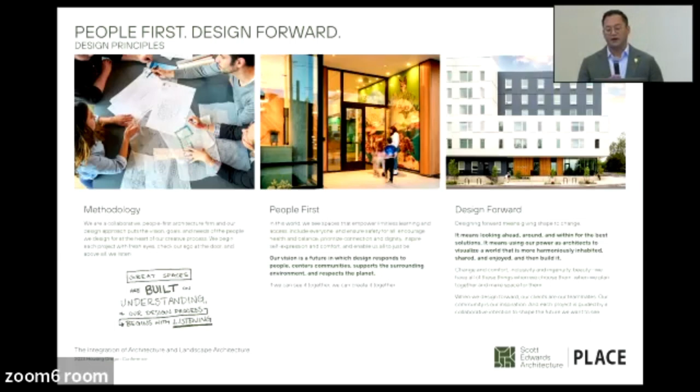The result is a collaborative approach between developers, the design teams, and local jurisdictions that lead to holistic social and physical contextual understanding, and give us the opportunity to create innovative housing solutions.

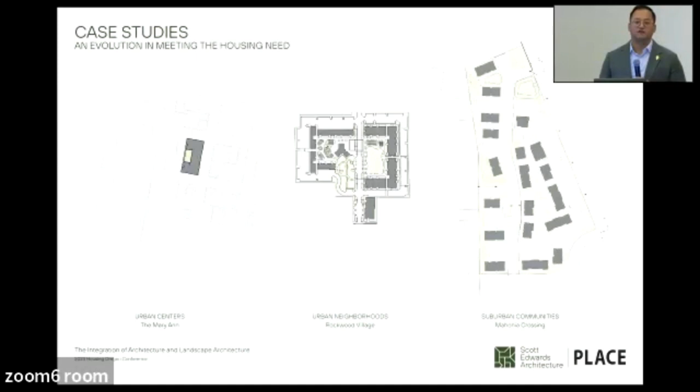So over the course of the decades, we have seen this site opportunity change and evolve. We're hopeful that today, as we go through this presentation, the strategies that we've taken to create homes and to create an integrated approach to placemaking will inspire developers and design teams to question how we explore this new terrain as we see the evolution into suburban environments, where there are site opportunities that are small and site opportunities that are very large scale master planning development opportunities with challenging sites.

So to start us, I think we're going to start with the one that we are all most familiar with, placemaking in urban centers. So the Beaverton project, the Mary Ann, it is a Reach CDC project, and the site is located on Main and First. The site is located between the local high school that you see to the left, and it's on the western edge of the old town downtown core.

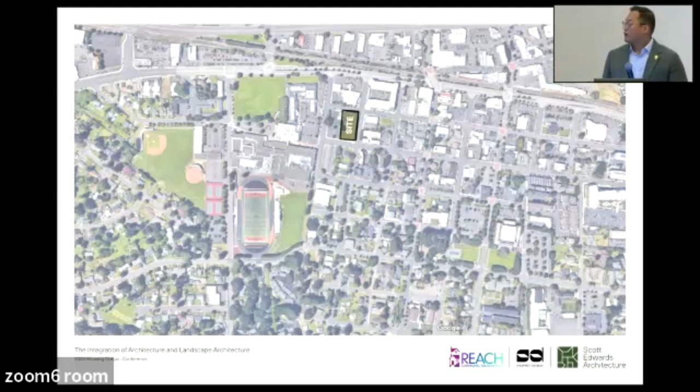This particular site actually has very walkable amenities. It's got a strong context. There was a lot of urban development that had already happened recently in the years leading up to this. So this was the first Metro bonded project. It houses 46 residents.

And the approach to these types of developments on these half block and full block sites, the focus has historically been on zero lot line buildings that have street engagement. The ironic part when it comes to providing housing is that the way the development code for these jurisdictions is often written is that it's really trying to create an activated streetscape, geared towards the idea of mixed use, that there's a mixed use component on the ground floor, the kind of vision for retail and restaurant.

And a lot of times that vision of program doesn't necessarily align with the needs of the residents and the type of environment that we're creating. So on these affordable housing projects, through the years of work that we have done, design teams, not just SEA, but across the board in the state of Oregon and outside, we really asked ourselves, how do you create an activated, warm streetscape when you don't have that mixed use component?

So the first kind of traditional takeaway from this was really creating these activated corners, respecting the desire for these local jurisdictions to have highly visible, activated street corners, but at the same time providing an opportunity where we could create warm, welcoming lobbies that have a direct connection to the outward-facing community. We can program these warm lobbies with direct visual connection to resident services, so they have eyes on the street, and they also engage with the community from a visual standpoint.

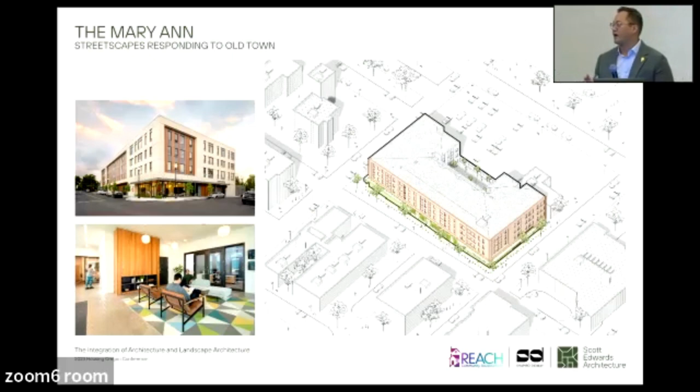On the Mary Ann project, this idea presented an opportunity on the primary corner on First and Main. On the second corner, what was interesting about this project, being the first Metro bonded project, the city of Beaverton was highly engaged with us in regards to programming and what their desires were for the project.

So in collaboration with them, as well as with Reach CDC, we spent a lot of time talking about the fact that you've got a half block building, your lobby is only going to be so big. What else are you going to put in this building? So where we landed, there were two components on the ground floor that were a little bit unique to this project. The first one was on this corner of the building, we decided to create a flex space.

And the idea here was that it wasn't a community room solely for the residents, but that it was a community room that could be shared between the residents, the local jurisdiction, and other communities or other community-based service providers in the area. So over the years since this building has been open, this space has been used for community activities.

That are both with Reach CDC and outward-facing service providers, and it's been used for things like administering vaccinations, getting people registered for health insurance, creating this flexible space that is engaging with the community, and the city of Beaverton is also able to use it as a meeting room for other needs. So it was a way to connect the building physically with opportunities for engagement outside of solely residents inside the building.

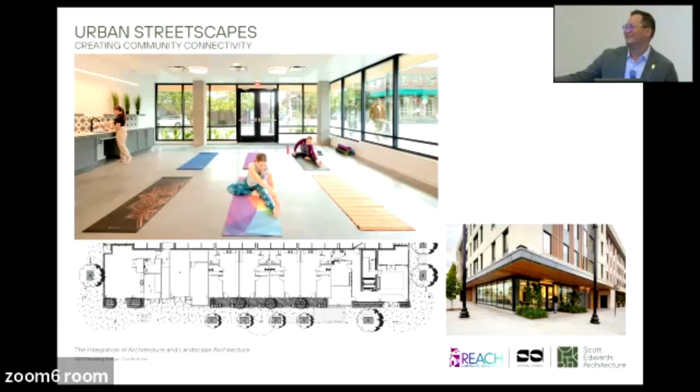Between these two corners, we located a series of ground level units. So this was in response to two things. The first one was the need to fulfill the need for housing on this development, that we needed to provide additional units on the ground floor as well as the upper floors to meet the housing need.

But it also provided an opportunity for us to say, well, street facing ground level units provide a different type of living experience than living above. And how can we create a different but equitable environment there?

So a lot of times when we've done street ground level units in the past, we've done them elevated on a platform in a stoop. The downside is that we recognize we wouldn't be able to create an accessible unit that way. So if somebody says, well, I like the fact that I can have a unit engaging directly with the urban environment, some people just want that garden experience, they don't want to ride an elevator every day but want a different experience. So we asked ourselves, if we do accessible ground floor units with direct access, how do you create this idea of home and ownership?

Through simple strategies of stepping the building facade back a little, we avoided creating a gate, since a gate can feel like a barrier rather than a sense of security. Instead we created a series of elevated planters to give a little breathing room. The idea wasn't to create a patio space for people to live in, but to create a small separation between the public and private realm and a sense of entry for residents.

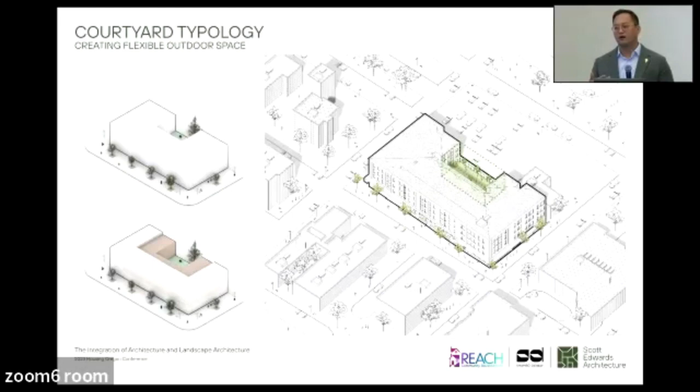When we do zero lot line buildings, our landscape integration story is often isolated to the streetscape. But the good news was that on the half block and full block projects, we had the opportunity to create courtyards, which naturally led to U-shaped buildings and a courtyard expression. On this project, we thought of the darker C shape shown in the diagram as an urban oasis, creating a building facade in a courtyard with a very different expression than the street expression.

This creates an urban oasis for residents that, unlike the ground floor's engagement with the street, offers flexible outdoor play areas. The concept was an open green lawn on the upper floor with seating areas so Reach and service providers could bring out temporary play equipment when kids are out there, but also pack it up to use the space for other activities.

Historically, the idea of creating this outdoor space is to create an indoor-outdoor experience. We provided a community room that functions to hold large engagements, but the idea is that it's a place where multiple generations of people living in the building can come in for art classes, cooking classes, and more.

This was our opportunity in urban environments, where we had the chance for the courtyard typology and these special urban oases. As we go on, the takeaway for us here is that the community engagement strategy on this project really focused on working with Reach CDC, because they know their potential residents and clients, and working with the local jurisdiction, because they had a strong vision for what Old Town Beaverton would be like.

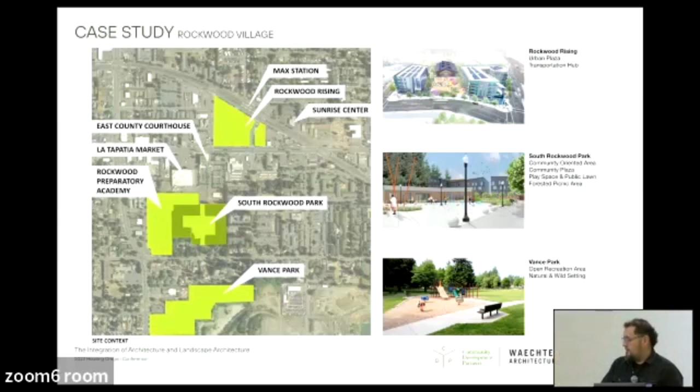The challenges for the site were that there's an open space overlay, and so the need was really to maximize the open space. Working with the city and the county, it was an interesting approach of how the architecture was going to function more as a framework and step a little bit more into the background, letting that open space be the foreground, be the point of interest, not just for the development, but truly for the larger community.

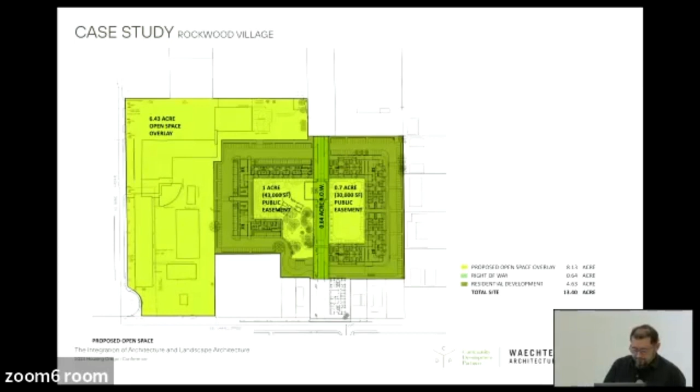The approach is, again, basically working with that super block and trying to break it up into smaller pieces, working with the urban grid.

One of the elements was that we needed to start thinking about connectivity north to south, with the addition of a street bisecting the site with a future connection to the county courthouse. That would be part of a future development, but trying to set up the stage for that connectivity. So that was a good synergy with the county to think of ways we could achieve that.

Again, this idea of the donut, if you will, is that we concentrated parking and vehicular circulation on the outer edges of the site. The architecture also helps create that articulation of the space, and then all the community events and community spaces happen in the interior, taking advantage of that street, which we figured out a way to pull the neighborhood through.

So that was always in our minds - how do we announce to the community that this space is there and available for them, that it doesn't feel like you're entering private property, but truly becomes a community asset.

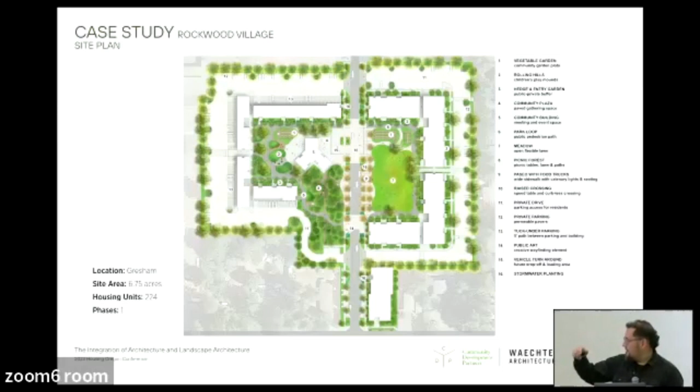So the program of the - sorry, this is not... does this work? There you go.

The basic organizer of the open space revolves around two elements: basically a community building that is kind of like a jewel piece in the middle of the open space, and it provides multi-use open spaces for meetings and gatherings.

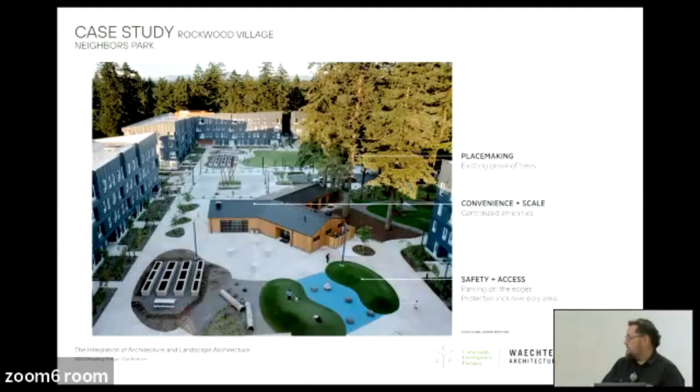These ideas of community building elements, such as the community gardens, play areas for children, and then the preservation of an existing grove of trees - it's always a great opportunity to save those trees. And you have kind of like this history of the site.

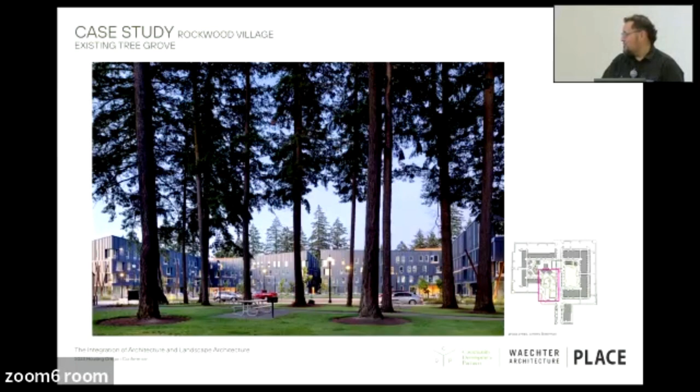You have this day-one character that the vegetation can add to it, creating these more passive and picnic areas. And then again, with the architecture in the background, kind of creating that backdrop, while also very elegantly and sophisticatedly articulated, but really letting the open space be that centerpiece.

Speaking of that street and how we address the idea of guiding the community to use the space, we also worked with the idea of incorporating art. These sculptural elements became like a wayfinding and identity element.

They try to be present at the south corner and then draw people in as a way to read that there's something going on further up.

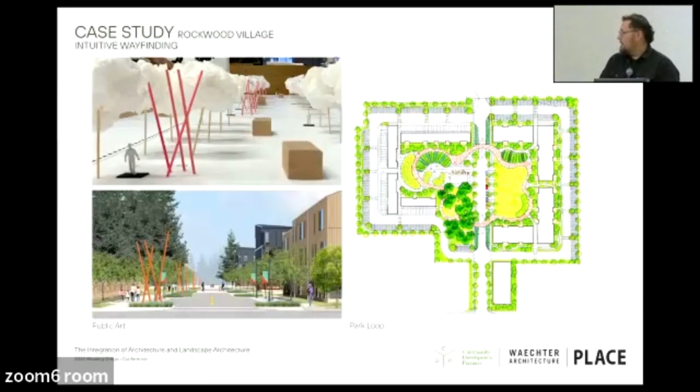And then even continuing beyond, the idea is that we would have this connection to the parking to the north, to the courthouse. We worked with Mudbone Grown, an organization that promotes community agriculture in the city, to provide basically a community farm that would create that use of the space, and it's been very successful - to the point that they're producing so much food.

One of the bike rooms that we originally had in the buildings was transformed into a food pantry. That was something that had not been anticipated, but the need and the offer are so great that now that's its main function.

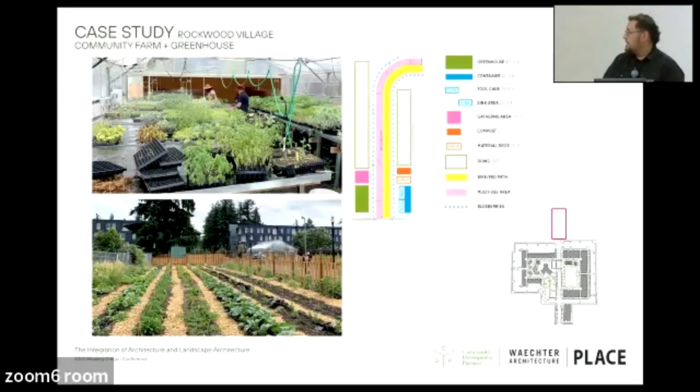So it's been great working with them, and Place helped articulate that site planning and how to make it efficient, and address other programmatic needs that they have in terms of buildings, greenhouses, and things. So really the lesson learned from this revolves around a good community engagement process that we worked through with Waechter, CDP, Hacienda, CPID, and Place, so that it's not just another project.

There was this sentiment that why is all the affordable housing going to the East County, and why is it the only development that we're getting? Through the community engagement, we were able to talk to the community, understand their needs, understand their concerns, and really focus that we're not just sticking you with a development. We're providing a community asset that is going to benefit everybody, and truly feel like it's contributing to that community building, paying a lot of attention to what those needs are, and then responding to those.

So that's the biggest lesson learned, and we're very proud and very excited about the future of this place. Talking to people that grew up in the area, they feel like it's really transforming. It's not the old Rockwood neighborhood that they used to know.

So in our evolution, now we're going to talk a little bit more about taking it to a larger scale and more of a suburban context. So let me get back to Dave.

So I think this next project, Mahonia Crossing, is a two-phase project that is housing. It's a community for all ages, servicing both families and seniors on a single development. It's providing 313 homes, targeted to open next year. When we looked at the themes of this year's conference, this project in particular was the one we thought had the most applicability for lessons learned on how we potentially approach rural communities moving forward.

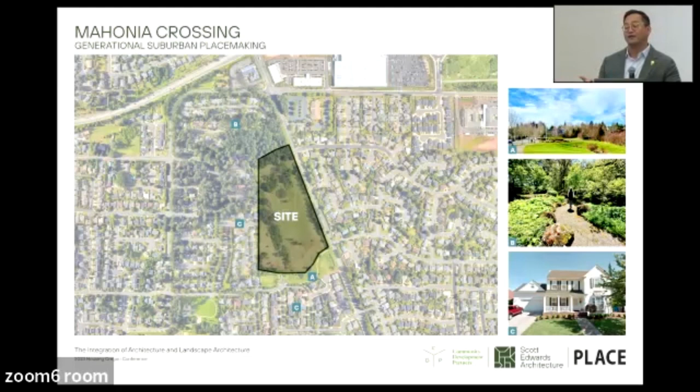The reason I'm honing in on this so much is because the activism we see in these strong, tight-knit suburban communities isn't that different from the activism in tight-knit rural communities where people have grown up and lived their whole lives. Even when the site isn't right next to their house, they're very active in their community and in how they see their cities changing.

On this project, we looked at the traditional approaches to providing housing in these suburban communities—often three-story walk-up typologies with open breezeway corridors and a single entrance. Historically, from an efficiency standpoint, they've been put on a grid, since that's considered most efficient for parking and for providing the number of units.

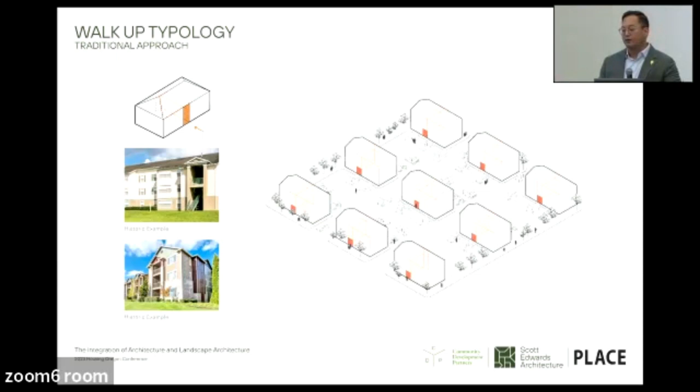But where this model fails is that it doesn't pay much attention to how you create a sense of community. People park, go into their building, go into their unit—there's very minimal opportunity for engagement with their neighbors.

So from an architectural standpoint, we started asking ourselves what approach we could take to the building massing to start breaking it down, so it responds better to the single family homes and provides a transition from the main road through the development into the single family residential neighborhood. We looked at different strategies—how do we work with gable roofs, how do we maybe turn these buildings 90 degrees?

But I think the most important thing we realized was that we asked ourselves, why are we only providing one entrance to these buildings? For the upper floors, we'll always need a stair and a primary access, but we said we're not taking advantage of the sides of these buildings.

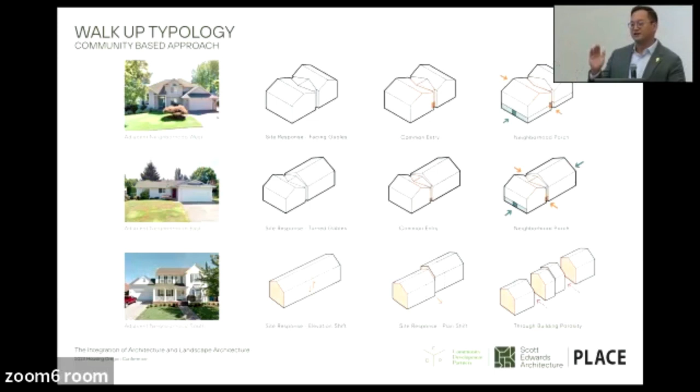So we started asking ourselves, for these ground level units, is there an opportunity to provide ground level access like we did on the Marianne project, but in a different way, creating this kind of side access that's different from the primary entrance. Through that, we rearranged the buildings so those side entrances face each other and act more like a patio, the way single family homes on a cul-de-sac work.

The idea was to give residents the opportunity where I live in a unit, you have a unit across the way, and this little pedestrian access point that pulls you into the development can be a place where kids play, similar to how kids play in a cul-de-sac.

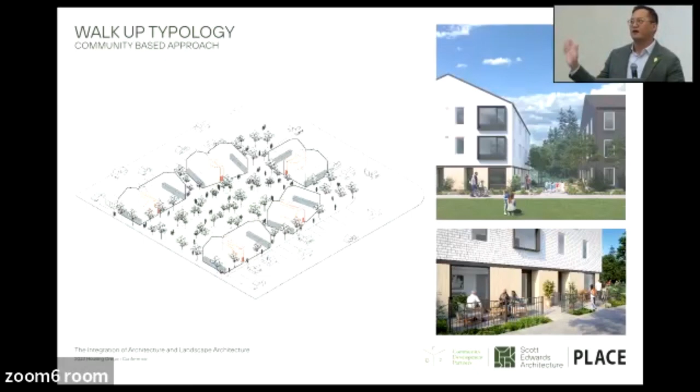In arranging these in more of a side-by-side diagram, we brought back the thinking we saw in the work Place was doing with Wechter on Rockwood 10, this concept of perimeter parking. That opens up an opportunity for a large scale green space, the way that on a very large scale courtyards functioned to bring community together in our urban environments.

So I'm going to let Miguel talk a little more about the site organization and how these diagrammatic concepts came to fruition on a real design.

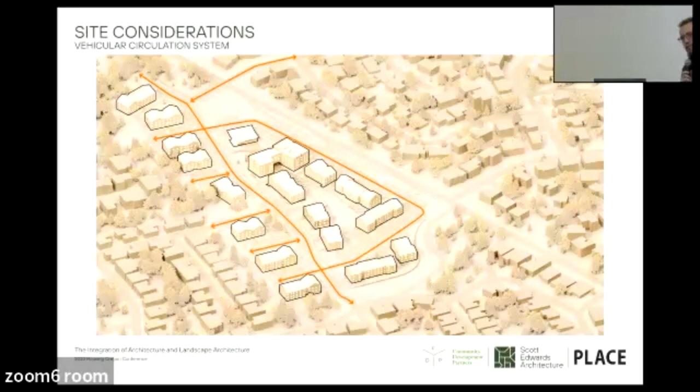On Jurassic Park, when they say 'welcome to Jurassic Park,' this is the part where we talk about the integration of landscape architecture. So thank you for your patience.

This last thing Dave was talking about, the opportunities to address the different sides of the building and create additional entries, really opened up the idea of looking at the circulation and how those buildings interact with the open space.

Organizationally, we first identified the vehicular circulation and parking, the things we still have to meet, but that take up the most space and start defining that arrival experience and interaction with the adjacent neighborhoods. After designing those vehicular systems, similar to what we showed in Rockwood Village, there's a ring of parking on the perimeter that is very intentionally and heavily landscaped.

For many people, that's the first thing you do in the morning when you go to work, you get in your car and drive out. We wanted that experience to start your day well. Then when you come home and park, you're not trying to cram into a compact space, and when you get out of your car, you're able to walk to your house and it's a nice experience. So we're thinking a lot about that user experience.

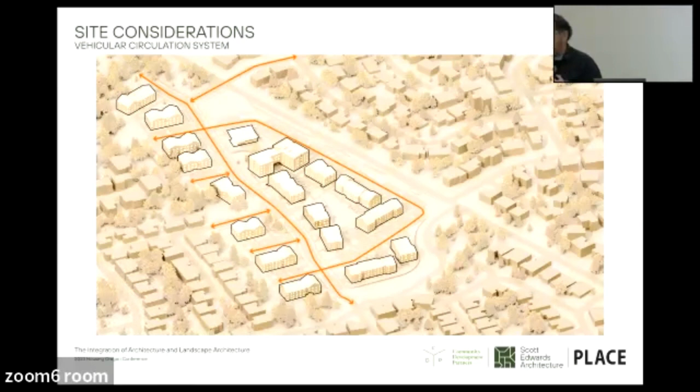With the perimeter definition of that vehicular circulation, we also identified, especially for phase 2 on the left side, how we enter those smaller lots and feed off that main spine, the vehicular road in between.

Then we really start looking at the interaction between the buildings, and those porches or entrances create that sense of neighborhood, so as you're going into your house you see movement, you see people walking by, there's eyes on the street, or in this case on the open space.

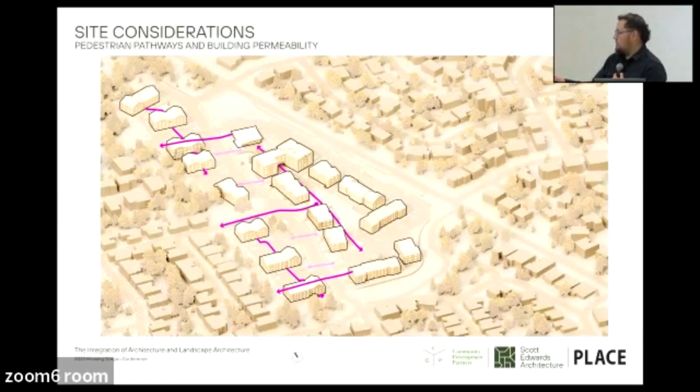It also creates opportunities for interaction, seeing your neighbors, being in proximity, having your areas well defined, but with opportunity for activity and connections, not only to the open spaces and amenities of the site, but also to other areas, especially going over to phase 2 or moving north-south through the site.

In thinking about that, we also distributed the amenities throughout the site, so we create opportunities for moving from one area to another, so you're not always just in your building, but have reasons to interact with your neighbors.

So the community building in purple at the top generates that flow, that traffic to move north-south, but then different services like laundry in different buildings also create that opportunity for movement.

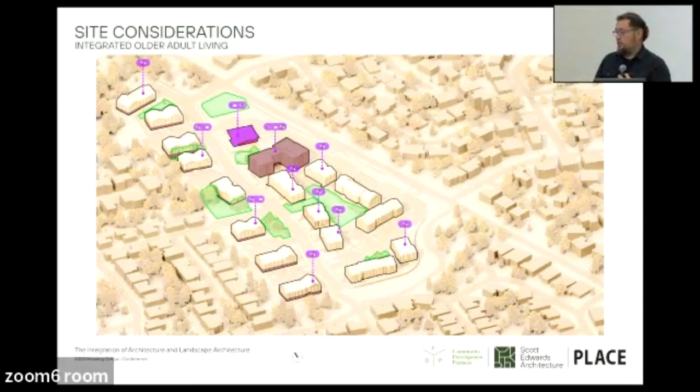From the standpoint of senior living, we also wanted to provide choices. On phase one, there's a building dedicated for senior living, but it's not the only choice. If you don't want to be in the middle of it all, there are opportunities on the ground level on phase two for a more quiet, reserved experience. But we were deliberate that if you go from the south buildings to the community center, you'll go through the senior building, creating opportunities for interaction, for truly multi-generational communities that exchange experiences and activities with each other.

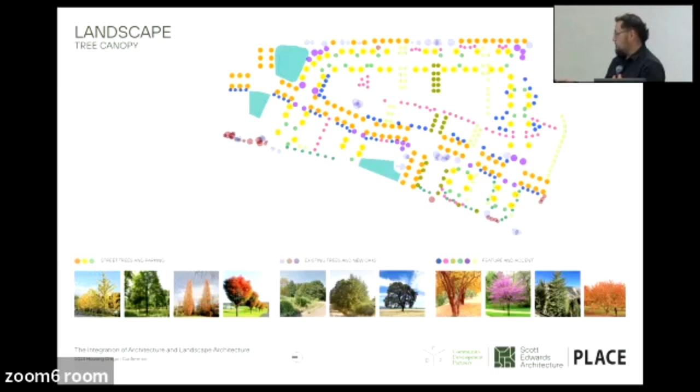The landscape really strives to reinforce all those dynamics. With the tree canopy, we try to provide wayfinding and identity definition, so there's a deliberate character for the streets, the vehicular areas on the perimeter, and different moments as you're entering the site between buildings, creating corridors with their own identity and character, taking advantage of existing trees we're preserving that also provide wayfinding for entries and feature elements, plus accent trees for feature areas.

On the understory side, there's also this idea to create a typology for the walk-up buildings, for the community areas, and for the parking areas, while thinking about maintenance and adaptability.

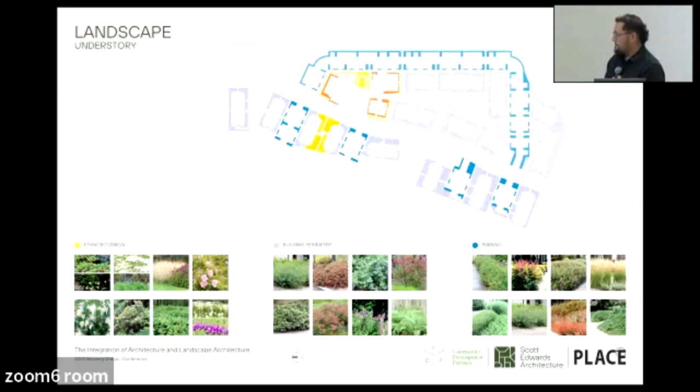We're using a lot of native species, trying to think about something that's going to be easy to manage for the company managing the housing development. And again, that attitude towards the edges and taking advantage of existing vegetation, needs for stormwater management, they also become feature gardens, celebrating these amazing oaks on the site that we were able to preserve, letting those elements inform the landscape as elements of identity, culture, and cultural pride.

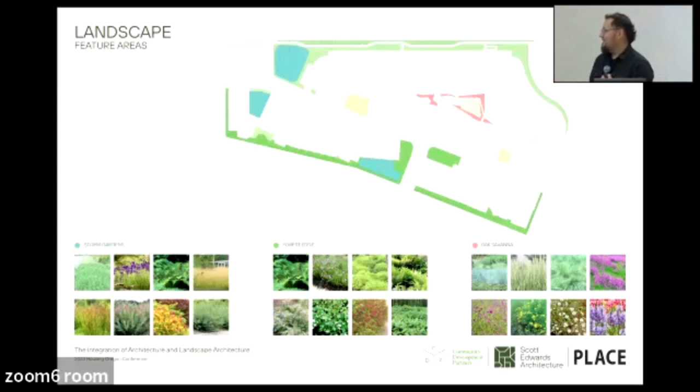The way the architecture and landscape architecture approach come together provides this opportunity for a sustainable community that, as mentioned earlier, is on a very challenged site with a 20-foot grade drop. The approach of working with multiple smaller buildings creates more flexibility on site placement, merging the concept of community placemaking while also responding to the context of the physical environment we have to work in.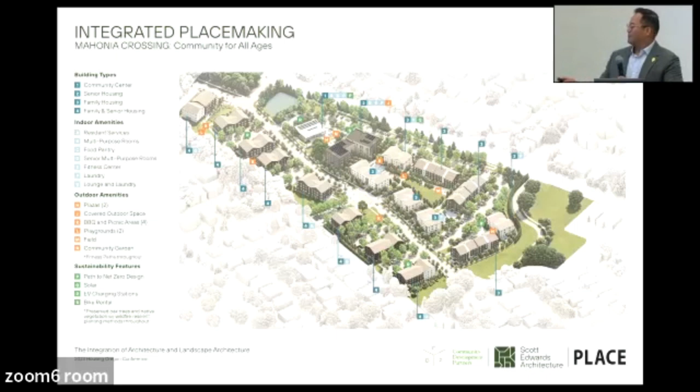This particular one was so important to us because this is the main access, this new road coming through the development, serving as the main access to the adjacent single family neighborhoods. So we wanted to create an experience for residents coming home, not just to this development but to the adjacent one, transitioning from this large scale housing community to the single family residential.

As you pull into the development, the first building is our community center, backdropped by a series of large old oak trees. We went through a lot of effort to save as many existing oak trees as possible, utilizing them to provide screening to the largest building, which is the senior building behind it. This was a concept of welcoming the neighborhood with the smallest of the buildings, backdropping it with the largest building, while using natural elements on the site to screen.

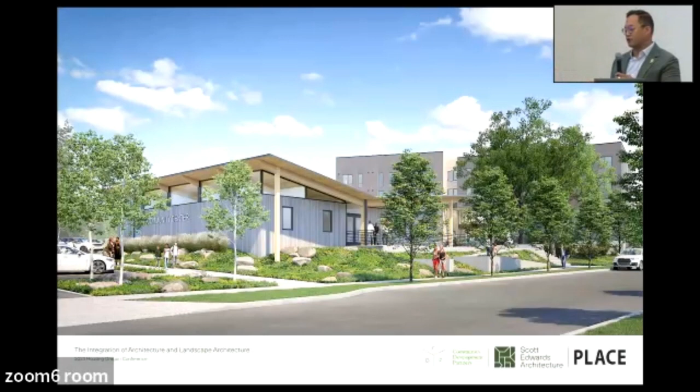As you continue down, that senior building reveals itself on the edge, but we chose to orient it with its shortest side facing the street, then transition to the smallest of our 3-story walk-ups.

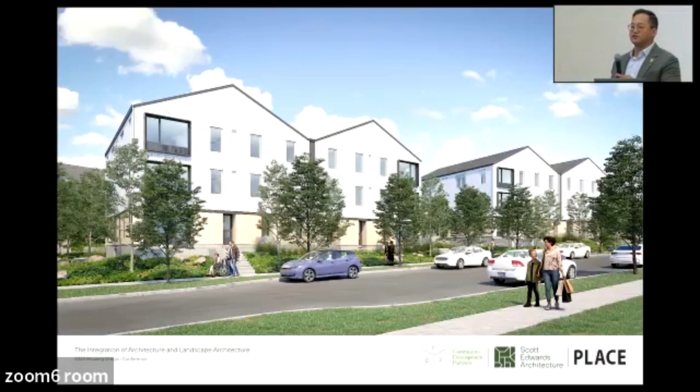So the approach to the 3-story walk-ups from an architectural standpoint was really creating these kind of elevated patios that were responding to the grade change, doing a warm toned base, and then working with these forward facing gables to start breaking down that scale as you transition to single family residential. And then this is a view as you exit and transition into the neighborhoods.

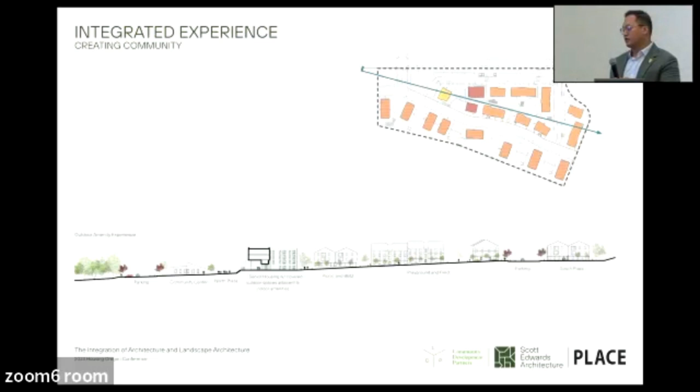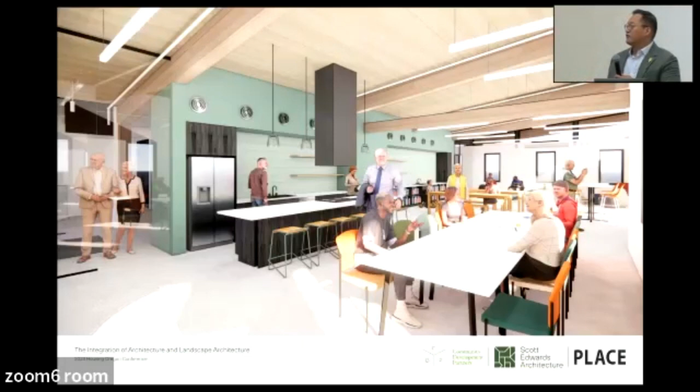So I think we initially started by focusing on what is the experience of this community room. We have, for many of the development teams and designers, a large history of designing community rooms that can hold teaching classes, that are flexible, that are warm. But this community room opens out to a hardscaped plaza area that has, to the left that you don't see in the image here, a community garden.

It's got a learning garden with edible plants, and we worked with PLACE to create this stepped plaza seating area. The idea was that we're creating a plaza bound between the community center and, on the opposite side, the senior building. So we really wanted to take the senior building as a component that can be the heart and the center of this development.

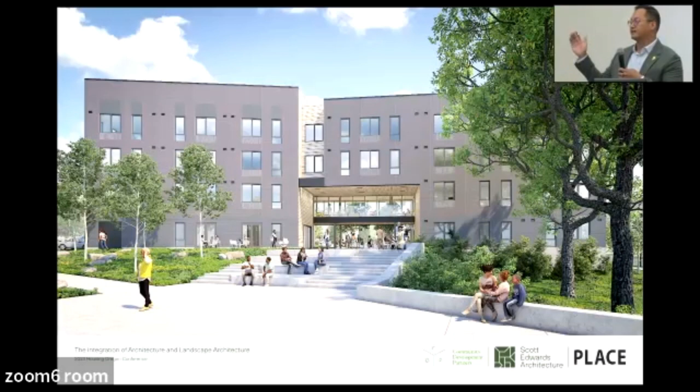Oftentimes, when we've worked with senior housing on large scale developments, they tend to be at the edges of the community, without strong engagement with the family building. So this concept was: let's use the community building and the senior building to create this plaza and make it a feature moment, where the building itself acts as a transition and gateway into a green park. We had the opportunity to create a much larger green park, but we wanted to create a variety of spaces.

The idea with the hardscape plaza was that this can be an area where, if the community wants to have an event, they can put out tables, bring in food carts—a very different experience than the green space you're seeing poking out under this 2-story opening.

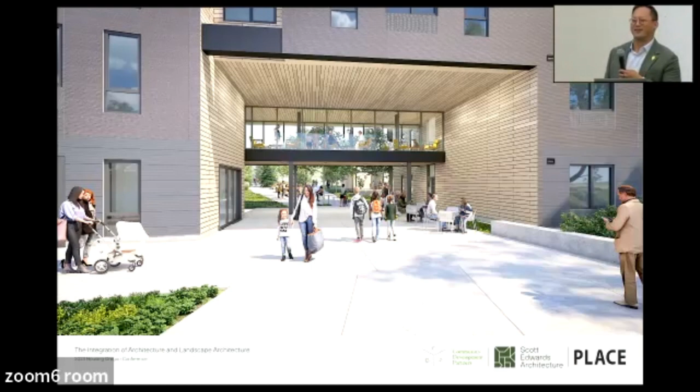There's a glass bridge crossing between on the second floor of the senior building, intentionally placed there because we recognize seniors have various levels of engagement they want to have with the community. In this particular building, a lot of the design team thought about our parents, our grandparents, and activities they like to do. A lot of seniors like to people watch, and we thought that was actually a fun opportunity.

We've got this great plaza to the left, this green space to the right, and we thought this was a great opportunity to take advantage of what was originally just a walkway and create some small lounge seating—an area where seniors, maybe they don't want to be outside in the park, maybe they have mobility issues, but they still want to be able to watch multiple generations, see children playing outside, and visually engage with the community should they choose to.

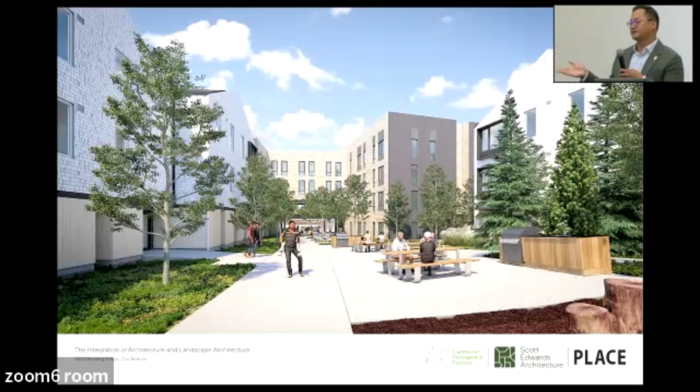On the other side, the senior building takes on a bit of that C shape, similar to the Marianne project we showed in the beginning, but it has the opportunity to work with these other 3-story walk-ups to create barbecue areas and ultimately open up to this bosque garden that place has envisioned for the green spaces beyond.

So the concept here is that we can have a wide variety of experiences on these sites—there's more that we can do with them than just the grid of buildings that we showed in that initial diagram.

So the hope here is that for development teams and design teams, we all do a good job of looking at the precedents of the types of environments we work in. We're hopeful that this presentation shows how our collective work in past sites and environments can influence the way we choose to work in rural environments moving forward.

I have a question about how you approach outdoor furniture selection and choices, and how do you balance outdoor furniture that's flexible and not fixed and can be used by the community, but tends to walk away or get lost, versus fixed. I see in this picture specifically there are fixed benches. How do you approach that balance of choosing outdoor seating and furniture options that will work for the community while also not needing to be maintained or replaced?

Yeah, that's an interesting question we are faced with. In our first drawings we always show loose furniture, and then at some point we have to have a conversation, right? It goes back to management, especially with people from the outside potentially using the space, then it really becomes an issue. So the way we articulate not just the furnishings but the overall flexibility of those open spaces is we try to build a structure so that if you don't have any furniture, you still have seat walls or something that defines the space so it can function without them.

Being very selective is something that sometimes takes a couple of iterations to get right. Like this idea under the bridge for the senior building, at first we thought, oh, this would be a great place to put chess tables and have people playing there, and then we had to adjust because this is going to be an access point here, this is going to be in the way. So it's a process.

But then it becomes about strategic placement, and yes, fixed furniture, but it has to be the right fixture so it provides as much flexibility as we can, like leaving an open space for a wheelchair, or making sure it's not in a spot where it's going to get a lot of sun and isn't going to be in the way. So it's part of the finesse of the design. But also working with management and their desires, whether it's 'no, we want this and we'll take care of it' versus 'I don't want any headaches, so let's just make it as simple as possible.'

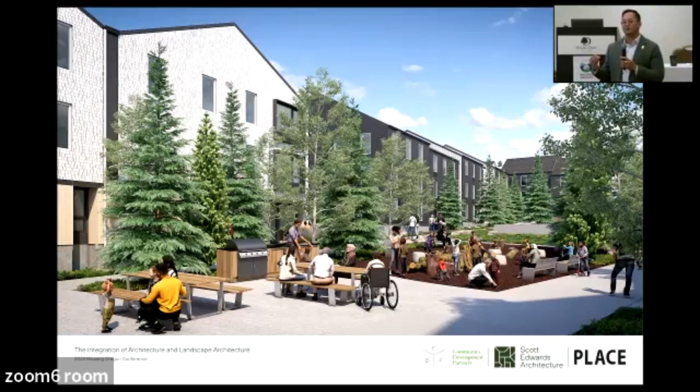On this project and many of our projects, to be honest, what usually happens is we end up with fixed furniture. The remaining furniture ends up fixed, bolted to the ground. Generally speaking, we found that's the best strategy. The hardest part with that is if you're trying to create a table situation, people can't scoot their chair in, so that's always a little bit of a negotiation.

On properties like the Marianne, where it's a community room and you have to go through the community room to get there, when it's really controlled, a controlled environment, small, those are the places where we've been able to have loose furniture, and it's been less of a problem because it's monitored and that room can be locked with no access. On a property like this, they did elect to do all fixed furniture.

So you're talking about those different community spaces, and you mentioned the purple dot thing came up. I'm just curious, was that program something you guys brought into it? Like, this isn't part of your main scope, but these little ideas - what are those spaces used for? I was intrigued because you had the community center, but then you had a bunch around the site.

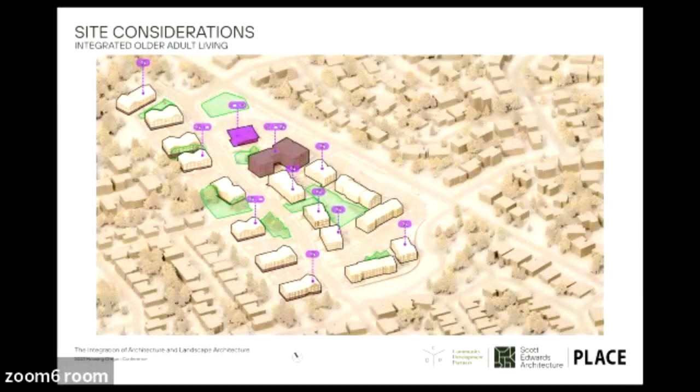Whenever we look at our community spaces, whether distributed on a large site like this or on a 6-story building, part of the reason we like a distributed approach is it provides an opportunity for residents to have passive engagement. So the concept is that if I live on the 5th floor but there's a specific amenity on the 4th floor, I'm going to pass my neighbor. It gives that sense of community just through seeing the person every day when you go do laundry.

On this development, the purple dots, we always start with what's essential for the project. Laundry rooms, when they're shared amenities, are a really great opportunity. On this project, because the site is so big, that was the first thing we started with.

Oftentimes we like to provide residents in the laundry rooms with an opportunity, at least a seating area and a folding table. Most residents, what we've found in our community engagement, is that they don't want to leave their laundry - they have a fear of that. So at minimum we try to provide that seating.

On this development, a couple of those areas we've expanded the seating area so it functions more. We've got a lounge area as well, and then it's got a little TV. It has Wi-Fi access so people can come in there and use it.

Other areas in this building, on the senior building, have their own dedicated community rooms so if the seniors want to get together and have their own place, they can do that. Adjacent to that, because that area is so central, we chose to also add a fitness area, located on the ground floor of the senior building, so it's accessible by the family and younger generations, but also really easily accessible by the seniors.

The idea and hope was that seniors will pass that on a daily basis, and the hope was that they will be more encouraged to use it. So that kind of placement is thinking about the end user.

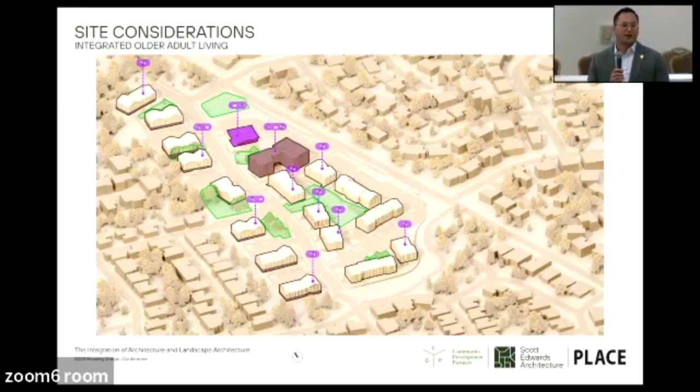Just curious, with Rockwood Village having been open for a year or two now, about lessons learned on the landscape design front - curious if any particular area is not used as much as anticipated, or if there was a lack of something, or you didn't provide enough of something. I'm just curious to hear on that front.

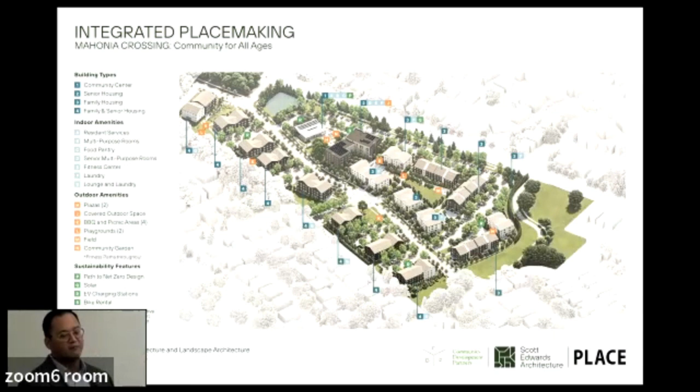On this development, the southern part all has parking lots in between each building so that it alternates between parking and green space, so those were kind of a non-issue. The ring of parking on the other side is really providing parking for the adjacent buildings. On the road south of the senior building, there are opportunities for parallel parking. The benefit here was that because it's a public street, the road is wide enough to allow parallel parking on both sides, giving residents that opportunity. It's not quite a 1-to-1 ratio.

This is the largest project we've collaboratively done with PLACE, and right now the development team and design team feel fairly confident about it. But we walk the site — I go out there every other week — and I walked it pretty recently thinking about whether I could find parallel parking if I lived on the parking lot. It's a big site, but I think it's not that far to the building.

These buildings are all given access on both sides, so if you have to park in the parking lot, it minimizes walking around and double looping back — that was another strategy we took. Then for the senior building and ADA spaces, those are strategically located close to the entries of buildings, so that an able-bodied person like Dave can walk the whole corner to corner, but we try to pay attention to those things.

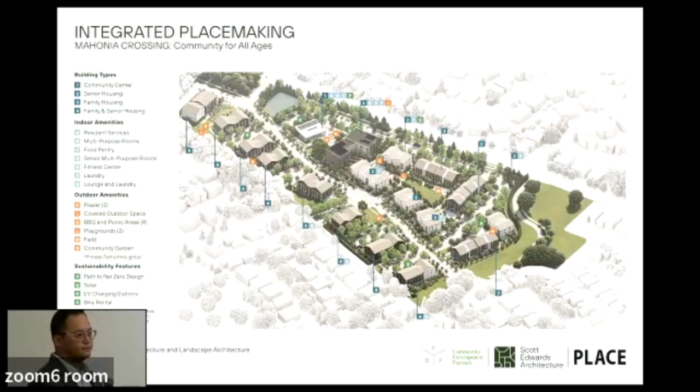The mailboxes and other amenities, along with the trash enclosures, are also distributed around the perimeter. One final note about parking: it's not like the people on the east side are just going to see parking. They're going to see layers of landscape, and in some instances the parking is sunk so you don't necessarily see cars as you're going through. So even though it's the back of the development, if you will, it still has a lot of intention behind being a good neighbor.

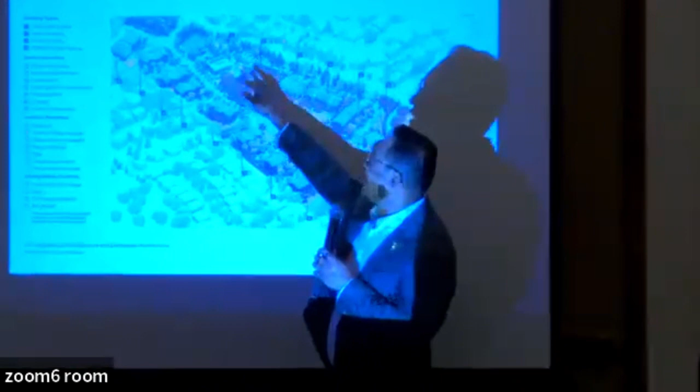Why don't I answer the senior question first? Let me walk over here so I can point. The senior building's positioning up here is partly because the community building is here. So the senior dedicated parking exists on this lot, and the primary lobby for the senior building is right there, so there is actually a dedicated drop-off and pickup area. When we do sites like this, ADA requirements are calculated for the whole site, but we make sure we're positioning a larger number of ADA stalls there.

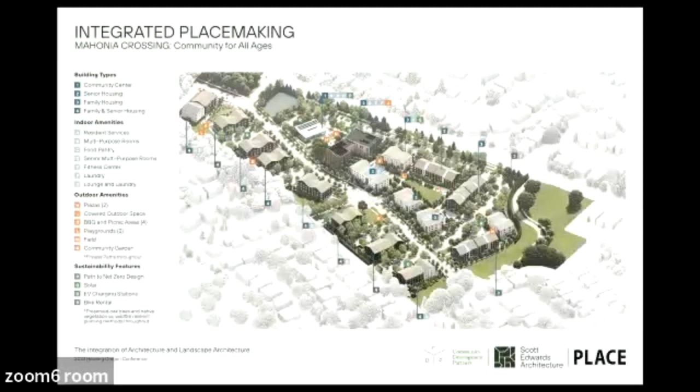So that is the area for pickup and drop off. The logic there was that there is a lobby right here that looks directly out to that, so that if seniors are waiting—I believe Engage is the service provider for this—and in our working session with them, they said they will have at times buses and vans that take groups of seniors to events. So the idea was giving them their lobby there, and the independent senior community room is also located there.

So the concept was that the senior amenities are in that area of pickup and drop off. And then in phase 2, since they're a little more scattered, there are loading spaces that are by code required to be accessible, and that would create opportunities for easier access.

And then just really quickly about the planting, it goes back to what Dave was saying about really paying attention to those warranties and holding the contractors to the fire. The issue sometimes is the schedule is challenging—I've had projects where we're planting in the middle of July, or in January in freezing temperatures. My question for a long time is, once the tenants move in, especially for family-oriented buildings, whether you plant at the right time of year or not and try to meet code requirements, how do you make sure that property, as it's operating, continues to have the budget to replace plants? Just trying to make that balance.

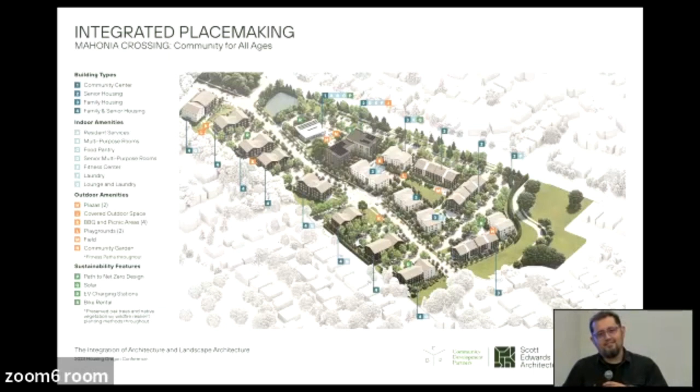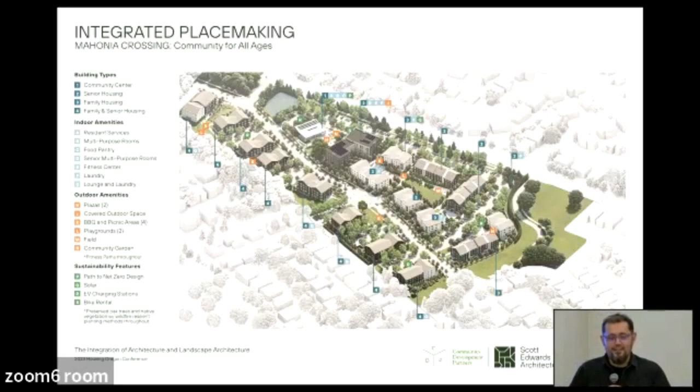Yeah, it's a tough one. In an ideal world, yes, you replace it and move on. But there are challenges, so sometimes we have follow-up conversations about whether we need to change or adapt something. I think the key to avoiding that is really paying attention to those areas and how they're designed—if you anticipate a high traffic area, let's put something more resilient there. And I love the concept of future proofing.

I'm gonna steal that. I might be able to answer this better because we've worked with Place, but we've also worked with a lot of other landscape architects. What I've noticed, and this is what you're alluding to, is people will take the path of least resistance—if I want to get from point A to B, they don't care what's there, they don't care if you provided a walkway, they're not going to walk around it.

It's those in-between sizes that tend to get trampled on. I think Place sort of inherently takes that into consideration, but I've noticed it's about the path from A to B, and being conscious of that and what plantings are going there. I've noticed through the work with them it's something that's ingrained in their thinking very often, and at other times maybe not as strong in some of our other partnerships.